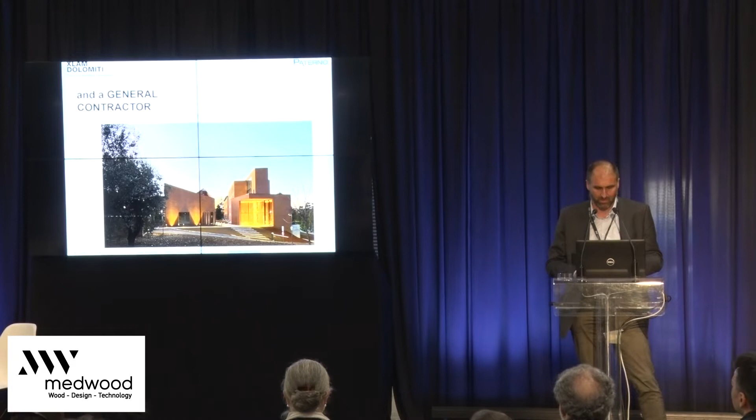But the company, we are located in Italy. We are a manufacturer and a builder. And in Italy, we are able to follow big projects like general contractor. For this, not only CLT production. In our company, we are able to follow from the design to the building modeling until the prefabrication, the installation, and the building management.

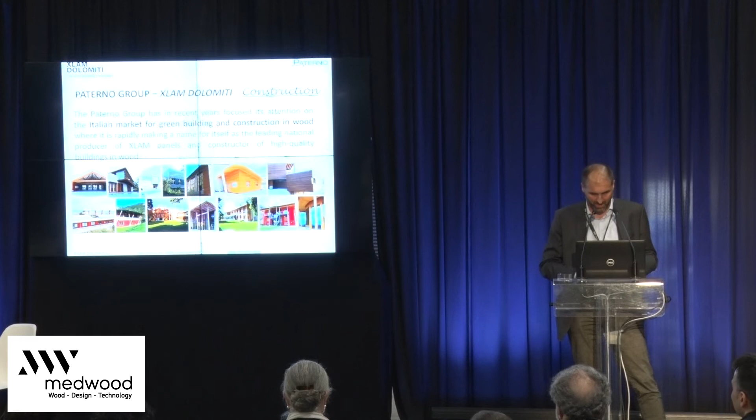Production, how it is made and what is our capacity. CLT means cross-laminated timber. In our production now, we have 300,000 square meters of capacity, and we are working on 20,000 square meters of area. What is the dimension? Cross-laminated timber means different boards, different lamellas, crossed together and glued together. My maximum dimension depends on the press. Different producers have different dimensions of the press, and the maximum in our case is 13.5 by 3.5.

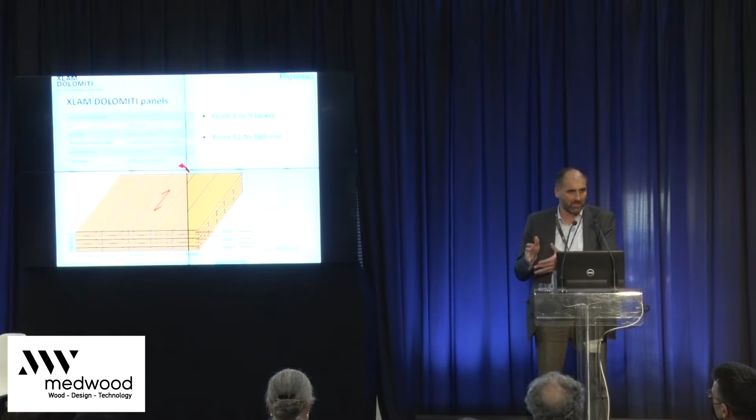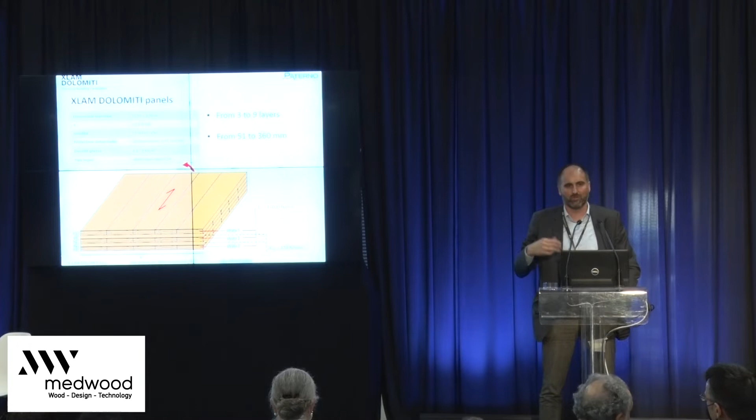Usually CLT has layers. It could be from 3 to 7 layers. The composition has to be symmetric. For thickness, we are talking about CLT from 50 millimeters, and the maximum in our case is 360 millimeters. The common use for wall and floor is between 100 and 200 millimeters, maybe 95% of our production.

And how is it made? The factory is all automatic. We start from the boards coming from the sawmill already dried. We do the finger joint, we put the glue, and there is a press. In our case, we have a hydraulic press. And finally there is the CNC machinery, which cuts all the elements, does all the holes, all the installation spaces, to be able to go on the building site like a Lego. Building with timber, in particular with CLT, is like building IKEA furniture, like a Lego. Okay.

Design, I go very quickly, because after, engineer Franco Piva will explain this much better. Usually we start from a beam system model. We do the FEM model because Italy has a lot of earthquakes, like Greece. We have to choose the right thickness. Different lamellas mean different thickness for walls and floors. But what we need to be able to build houses is this one, because we produce a rectangular element and we have to cut it rectangular, triangular, have the space for the beam, the space for the installation. From the architectural drawing to the production, the final file that we need is this kind of file. And the process in the middle Franco will explain after.

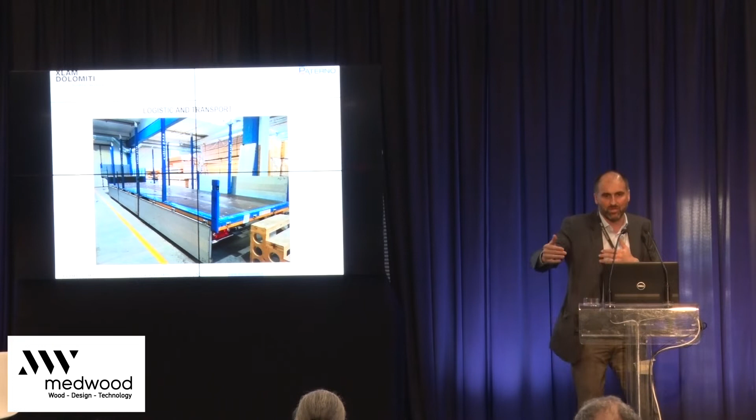Trucks. There are different kinds of trucks. How can I load the panel, and what is the maximum dimension I can use with this kind of transportation? For example, in this case, there is a particular truck where we can transport 3.3 meters by 12 meters vertically. Or in this case, it's just normal, 3 meters by 12 meters vertically, or horizontally. We already made 2 projects here, nearby in Greece.

And in this case, the dimension is the dimension of the trucks, that is usually 2.4 meters, by 12 or 13 meters. The dimension has to be 2.4 meters because you pack horizontally on the trucks. Or you can store vertically but covered. Okay, and in this case, using this steel element in the middle, you can reach 3 meters, 3.1 meters. And this is an example. Different trucks, different logistic systems mean different panel sizes. It means we have to do the engineering taking into account the logistic issue, and we must not forget it.

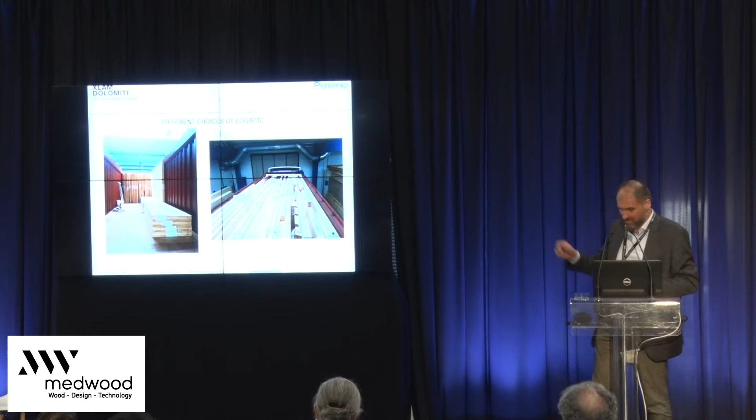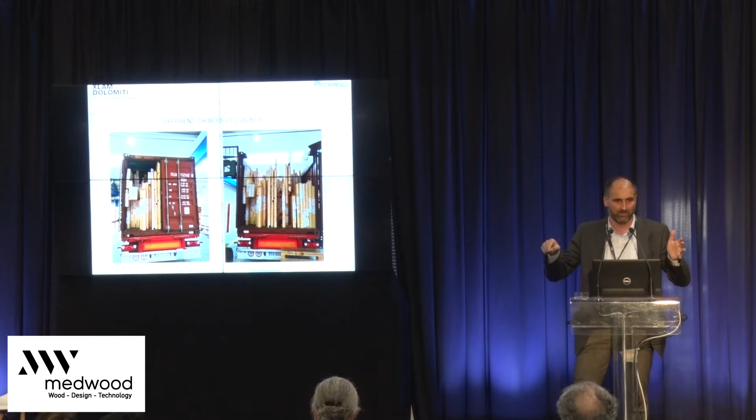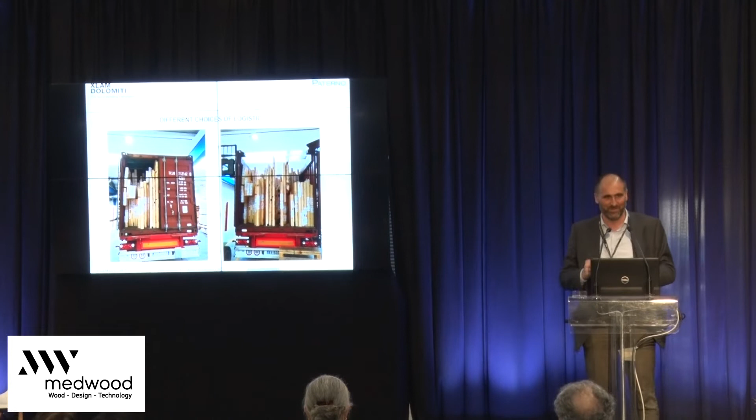For example, when we go around the world, we use containers. The door of the container is 2.35 meters, and the length has to be less than 12.00. This year we did a big project with 12.00, and we discovered that the internal part of the container is 12.03. There are 3 centimeters of space to fit exactly 12 meter elements.

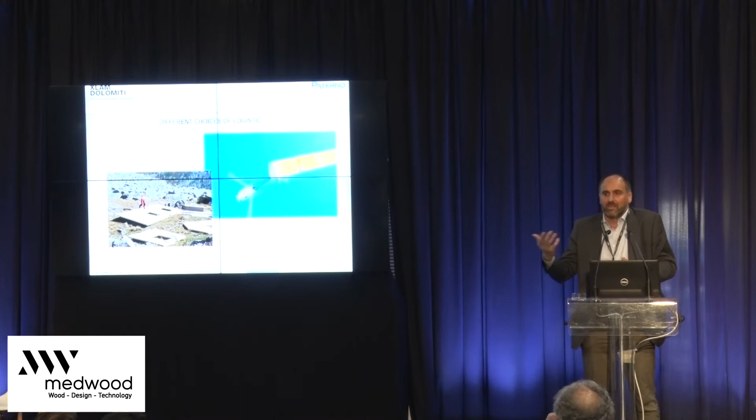Or, in some cases, we already built with a helicopter. We live in the Alps, and when we build a building on top of a mountain, we often use the helicopter. In this case, depending on the kind of helicopter and where it is, the weight has to be precise. So we cannot take only the average density of the wood. Usually we take every panel and give exactly the weight, because otherwise the helicopter can have problems.

Okay, different projects that we made, and I'll explain the differences. I just want you to understand the potential of this kind of technology. The first, made 3 years ago in the city center of Chioggia, is a 7-floor building, completely in the city center. Chioggia is like a small Venice, very near Venice.

And in this case, what is particular? Completely city center, no logistics space, and a lot of people around who don't want noise during the work. Building like this, 3 people, 1 floor each week, only using a drill and nothing more. So in the city center, this technology can help a lot in terms of logistics and noise. And then earthquake, fire, all the advantages that were mentioned before.

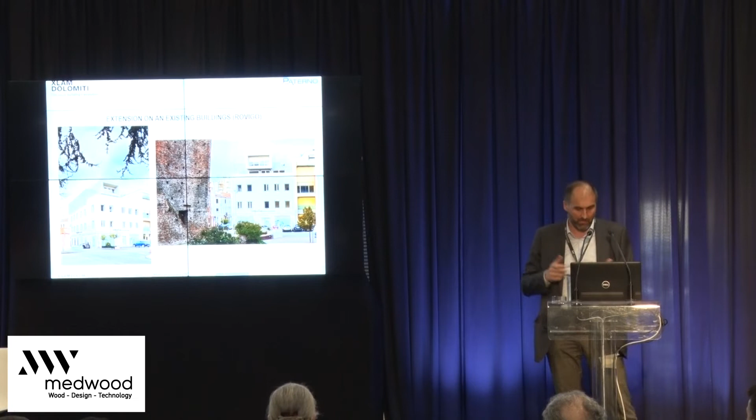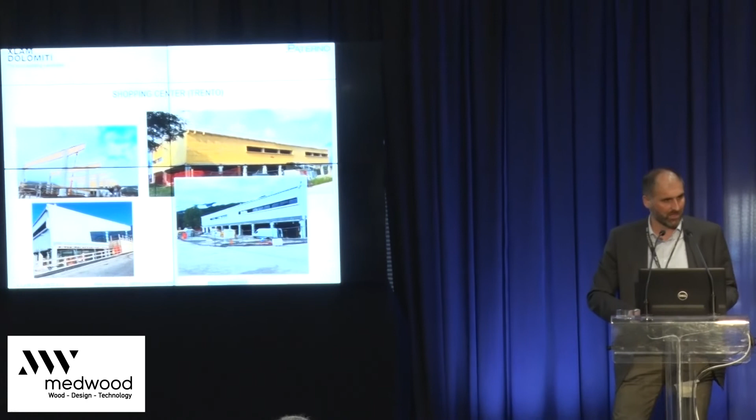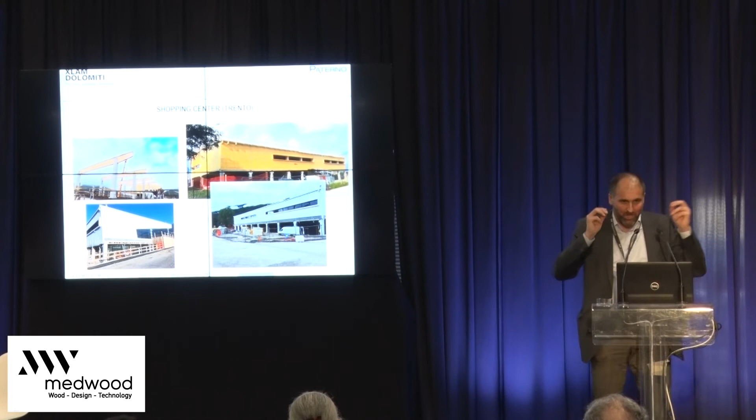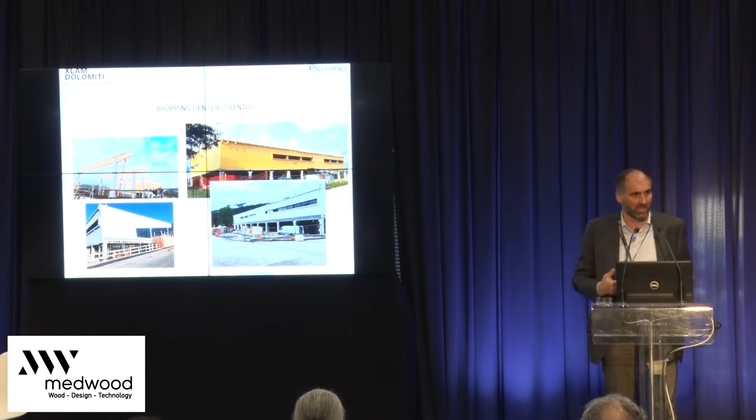Shopping centers. One of the businesses of our group is shopping centers. This is a shopping center made with concrete columns and everything else in timber. So we don't have to think only timber. In the case of a shopping center, concrete columns make sense because you have more flexibility in terms of space and internal distribution. And this is one.

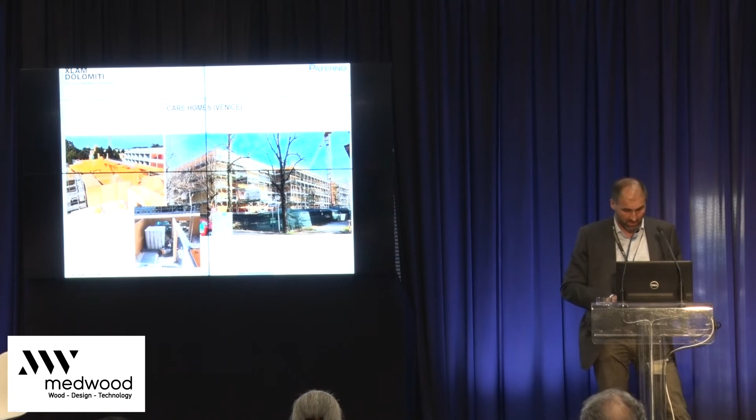Care homes. We made many care homes in Italy. Timber is very good for care homes because it's very fast. Care homes are usually very modular buildings, and using timber in this kind of building gives a lot of advantages in terms of time and cost. These are some examples of care homes. Schools. In Italy, a lot of schools are made using timber.

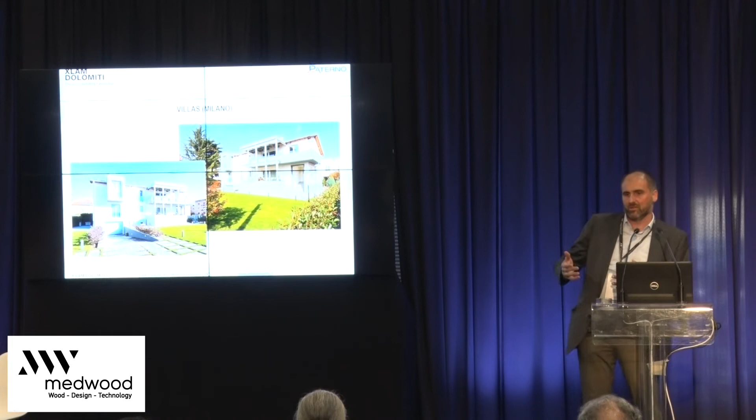Normal residential building. This is Florence, a 5-floor building. And a lot of villas. A big part of our production is going to build villas. And this is some example, but it's normal villas made by CLT and not by concrete or other.

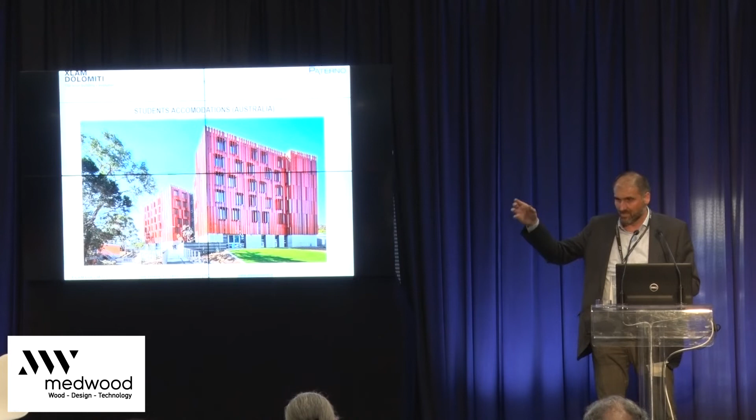Student accommodation, Australia. We made many projects in Australia in student accommodation, and you have to think the panels from Italy went to Australia. For this, it is very easy with this technology to build around the world. This is the first passive house student accommodation in the Southern Hemisphere. Okay, some images of this building.

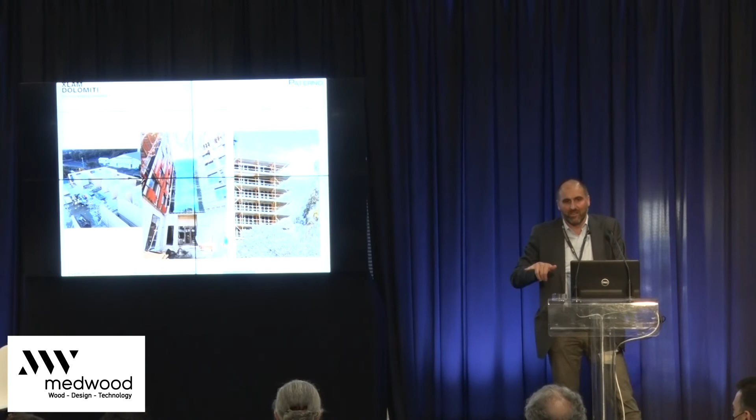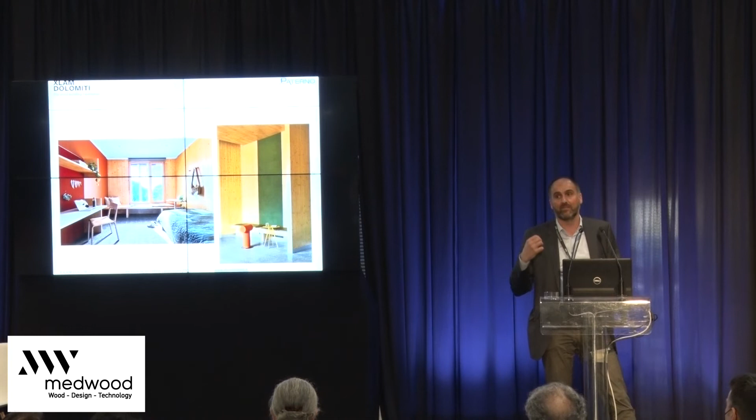You can see the prefabricated bathroom, because student accommodation is similar to the care home in the architecture. And here you can see this kind of building with the finished rooms using visual grade panel. CLT you can leave visual if you want. And some views of this point.

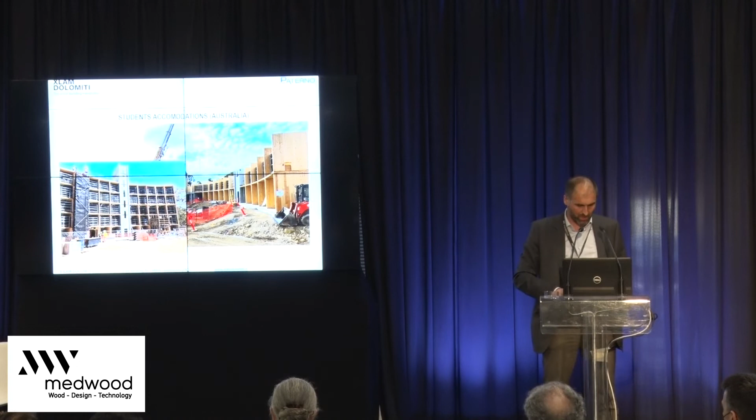Another student accommodation. This one was 650 student accommodations in Melbourne. The design and the production installation made from Italy. And this case is like before, prefabricated facade, and very easy, and they built this in less than 1 year.

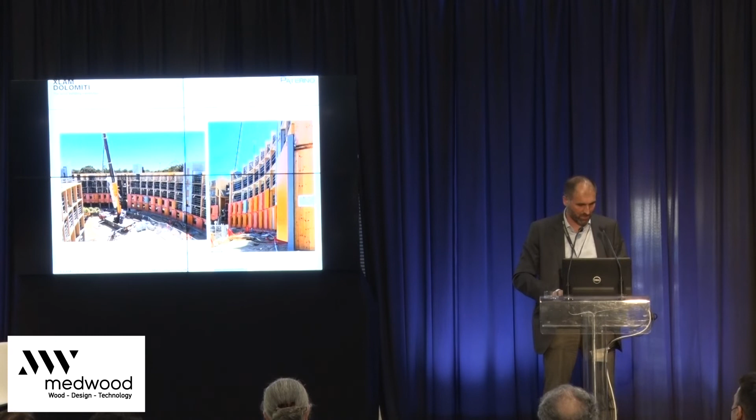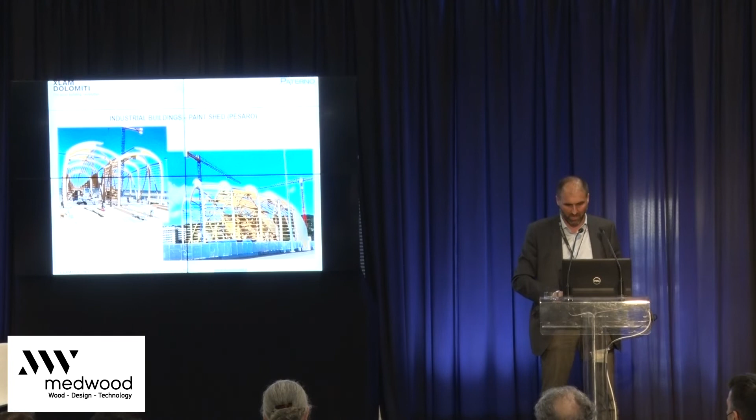Another application, before we have seen swimming pools, a lot of good swimming pools. This is a paint shed, near the sea. It's a very particular glulam structure in this case. And this glulam structure is very big because it's 30 meters high. And you have to understand that this boat goes into this building during the winter time for painting, for maintenance, for this kind of job.

For example, our history, my personal history in multi-story buildings in the last 10 years, but the history that was made by a lot of different producers of CLT in the world. I remember in 2010, 2013, the first 5 floors that we made, it was unbelievable, a 5-floor timber building. After different projects, now the 5, 6, 7 floors, I think that we make 10 per year, or 15 per year.

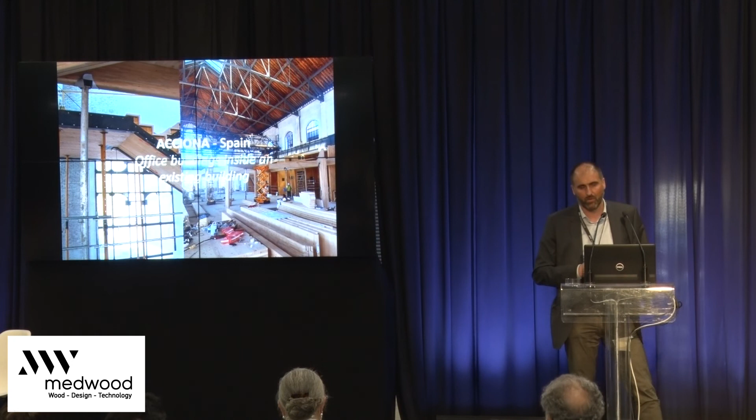What we are doing now, we have now finished a project in Spain with Norman Foster architect. It's the first project from Norman Foster made in timber. In this case, it's a very particular office building inside an existing building. All the columns and all the beams are made of chestnut, a European hardwood. Okay, and the CLT was all visual CLT, and the visual face was made of white spruce, because the architect Foster liked white spruce more than red spruce.

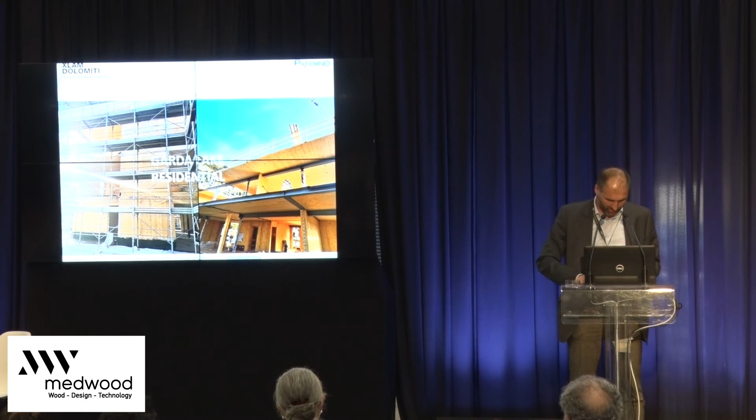Another one is a multi-story building, very simple, in Trento. Nothing in particular, we are on the building site. And one of the last is a very small residential building. This one is nothing in particular, but the location is beautiful. It's Garda Lake. We are near Garda Lake. The location is beautiful. I show this picture only because of the location.